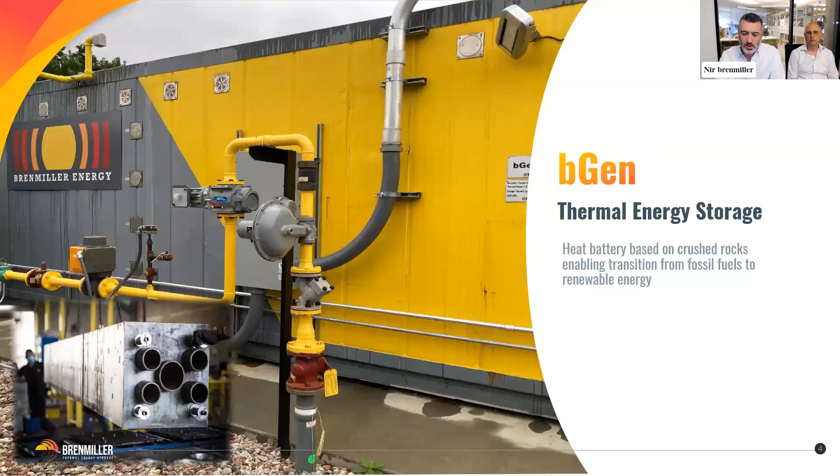So, our technology is named the BGen. It's a thermal storage that is actually storing heat in very high temperature. It's a heat battery. The heat is stored in crushed rocks, and this enables the transition from fossil fuels to renewable energy. And how it works. So we are storing heat coming from various sources, and I will show you shortly, in this modular heat battery. Each module contains cells. Then these cells are stacked into a module and into a pack. We are doing both capacitating the heat and exchanging the heat to steam or hot air or hot water.

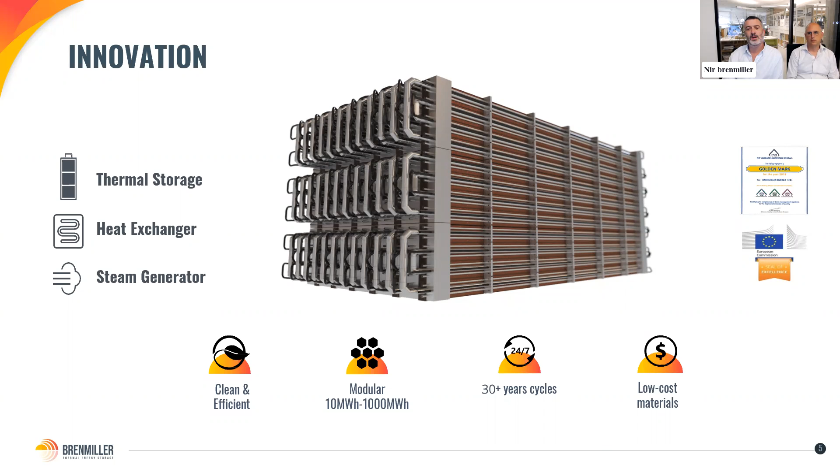All the materials we are using are eco-friendly. We are using only recyclable materials, no hazardous material, no chemicals, and no degradation over time. Our cycles here are unlimited, and it will work for centuries. There's nothing here to break or deteriorate. It's a very solid machine and a clean solution for clean energy.

So how it works? We are charged by either electricity or heat source. The heat source can come from solar, from biomass, from exhaust heat, can come from steam that is in surplus in a power plant, or can come from electricity. The power can come from the grid at peak hours, can come from solar, can come from wind overnight, or can hybridize. This amount of heat that you got can be topped by electricity or vice versa. Then we can discharge either simultaneously, which is quite unique for us, or in time shifting, and we discharge steam or hot water or hot air.

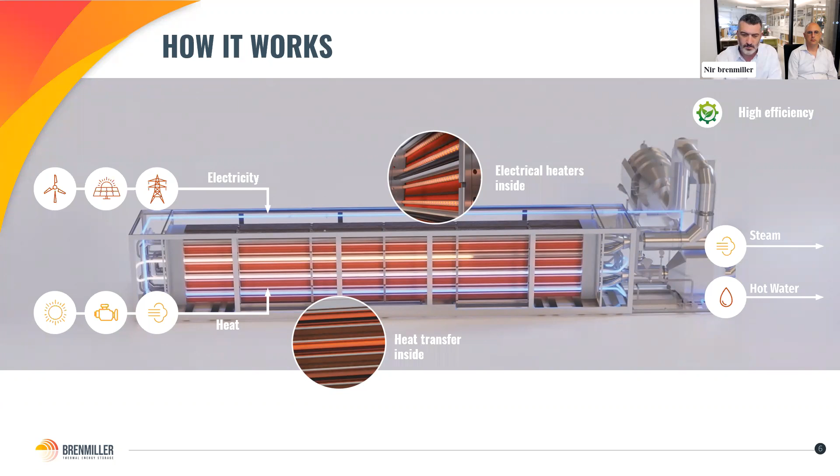The main update that we bring in this call is around the Enel project. The Enel project is a utility scale thermal storage that we inaugurated just lately near the city of Florence in Italy, with Enel. Enel is a global utility, and this project is first of its kind, and it's the first time that you see such technology incorporated, embedded into a gas-fired power plant.

It's a strategic milestone for the company, and it comes in a very special timing where thermal storage as a whole is getting a lot of momentum, and we'll show you shortly the numbers and figures of this market. This year, we have McKinsey pushing forward with the importance of thermal storage, and we'll show you shortly the reports and numbers they put up. And this project potentially will enable us to cooperate widely with the other utilities and with Enel specifically. We've been commercial in the industrial scale projects, and this puts us in a commercial ready position for utility projects.

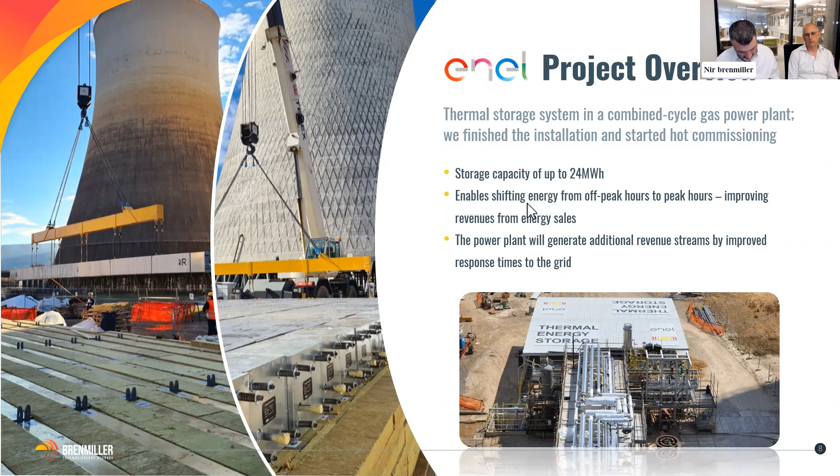Some additional updates for the last half. So we've signed an MOU with a couple of European renewable energy developers for the economical feasibility to integrate our technology into a green hydrogen production project. Now, the technology of Brenmiller is required in the process of turning the green hydrogen into a green methanol. They require 24 hours of process steam, and in order to keep the hydrogen clean and green, this steam needs to come from a clean source. So we examine the integration of our system in converting the green hydrogen into a green methanol in an electric way. We will power our system electrically and then generate clean steam.

We have withdrawn 4 million euros from the European Investment Bank as part of constructing our manufacturing plant. We will elaborate a little bit about it further down this presentation. But bottom line, we are progressing according to the timeline to be ready to manufacture at a very large scale, up to 4 gigawatt hour per year. And we'll be ready in the first half of next year with this production facility, and it's a very efficient and advanced manufacturing plant.

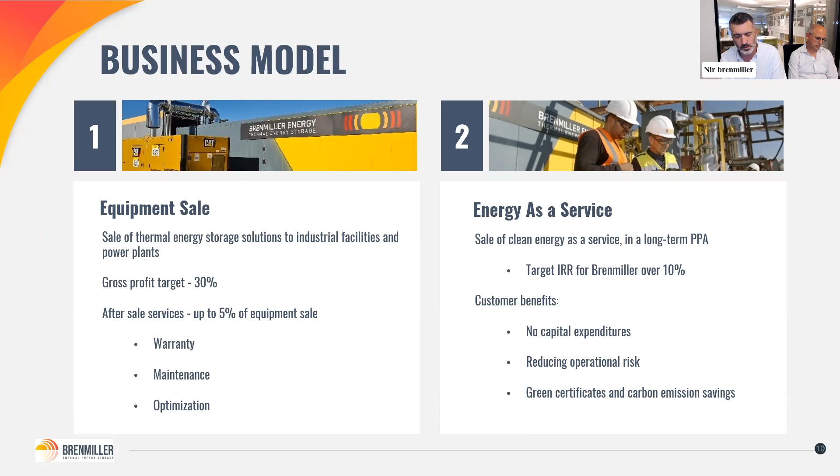And we have a very aggressive IRR target, and we believe that it's something that is doable, over 10% of project IRR, and you have recurrent revenues, and projects are getting in a very good position to be financed today with all the green support of grants, loans, especially in Europe, but also coming now into the US with the Inflation Reduction Act and some additional DOE plans. So we are preferring this model for most of the projects today, and this is the main business model we pursue.

The main project that we are focused on today is Philip Morris 1 in Romania. So last year we signed a framework agreement with Philip Morris International to decarbonize the production plant, and under this framework we have signed the first project in Romania. We are moving into detailed engineering after basic engineering.

We are planning to get permits in the first quarter of next year, 2023, and then to break ground. This is an approximately $9.2 million project, about 30 megawatt hour capacity, with the option to grow all the way to $14-15 million if the clients want to.

And this is a very important project for us and for Philip Morris, because we believe that a successful inauguration of this production plant will open the door to many more projects. Of course, we signed a framework agreement so we can work globally with this team, and they have over 40 production plants globally and an amazing decarbonization plan, and we plan to be part of it.

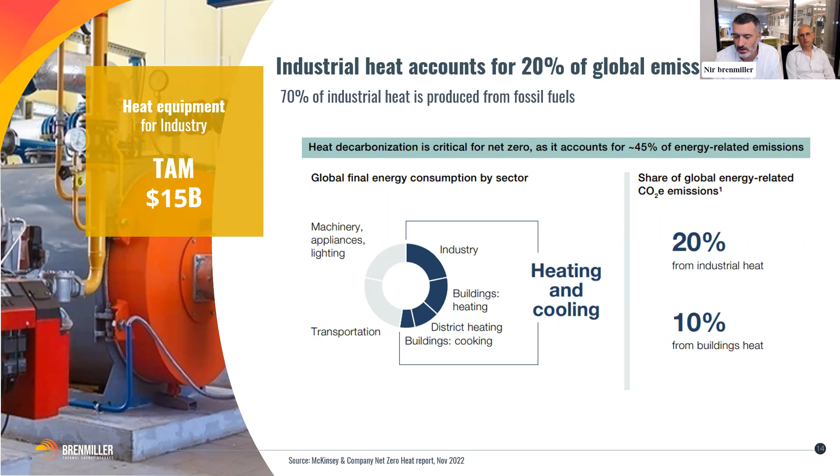Now, this is something that is not trivial, but industrial heat accounts for 20% of global emissions. That's maybe the largest single source of emissions globally. And most of it today is not clean, not renewable. We provide a market-ready, simple solution. We see it as our low-hanging fruit, immediate market. Especially in Europe today, where they have a gas crisis and 62% of Europe's gas goes to heating, us providing this simple solution to replace gas is very interesting, and we get a lot of attention from Europe today.

We do have solutions that we can explore in that direction, but in terms of business focus and technology focus, we focus on these medium range temperatures. We think that this is really the easiest chunk of emissions or energy that you can decarbonize. So this is our immediate market, and there is a lot of energy and a lot of market in the medium temperature range.

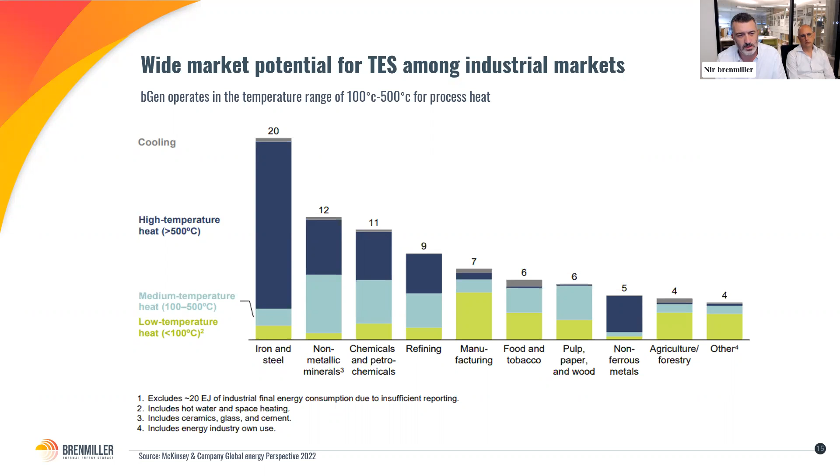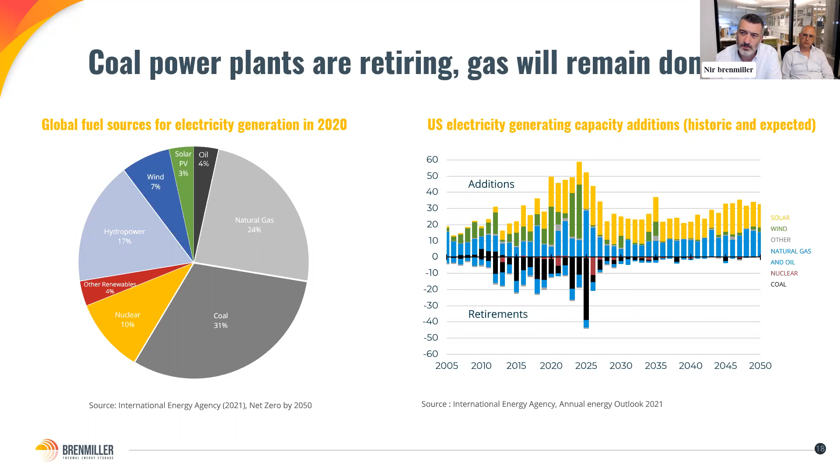So we need to do both: decarbonize as much as we can the gas-fired power plants, and we have all these decommissioned and retired coal power plants, and we provide a very interesting solution for retired coal power plants that I will show you shortly. Now, the more renewables you integrate into the grid, the more you see the profile on the bottom.

Okay, so you see low penetration renewables. This is the profile of this power plant. And with high penetration renewables, the power plant is required to shut down. And power plants cannot shut down. It takes them hours to ramp up. It takes them hours to cool down. So bottom line, they are burning the same amount of gas, the same pollution, the same emissions, and we are paying twice. So our technology enables these operators of power plants to shift the excess heat to our system, then to push it back when they need it, and bottom line, burn less gas and reduce emissions.

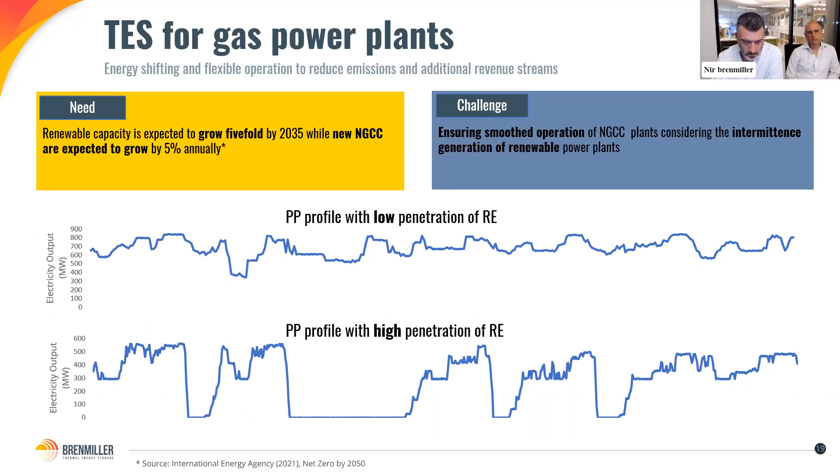This is for coal power plants. So we take an existing facility that is being decommissioned, we take electricity from the grid, we take surplus of solar power, and then we can shift it and convert this power plant, this old coal-fired power plant, into a green peaker using the same infrastructure, the same turbine, the same grid connection, in a long duration way and in a very large scale. It takes so many batteries to do the same that it's not going to happen with batteries. And this is something that we are investigating and developing for a future solution with our technology.

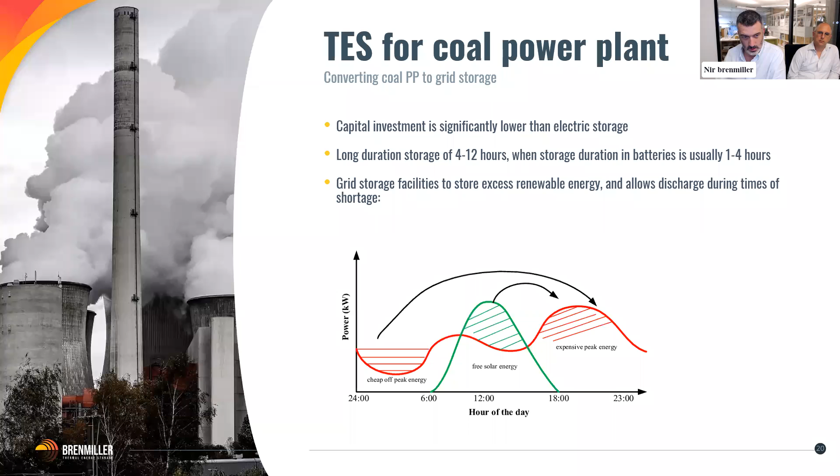So we have the immediate industrial solutions that are commercial, and we are marketing them to the market. We have early commercial initiatives with converting gas-fired power plants, and this is for a couple of years ahead, 3 years ahead, where we will start with coal-fired power plants. These are long processes and very big systems, so we need track record, and we need the market to see the Enel project running for a while before we can take it into the commercial phase.

We operate from Israel to the west, so we have few local activities. Our main attention today is for Europe. Europe is by far more advanced in terms of regulation and grants and loans, but also the special situation with Russia is taking our technology from being an environmental solution into an energy security solution. These accelerate the processes we have, and I believe that in the next couple of years, we will see the fruits of these processes that are running now. Most of these processes are industrial scale projects. As I mentioned, we are funded by the European Investment Bank, and Enel is our main pilot and partner to date in Europe.

In the US, we have built a pilot, and we are cooperating with the New York Power Authority, and we are examining solutions for industrial manufacturing and for district heating in big buildings in cold locations. We also operate in Brazil. Brazil has a highly volatile market of energy and gas prices. We have partnered with Fortlev, a local plastic equipment manufacturer. The company itself is using a lot of energy in their production facilities, rotomolding machines. So we integrated the system into this rotomolding machine, and now we are in phases of designing and erecting a new production facility for this technology in Brazil together with Fortlev.

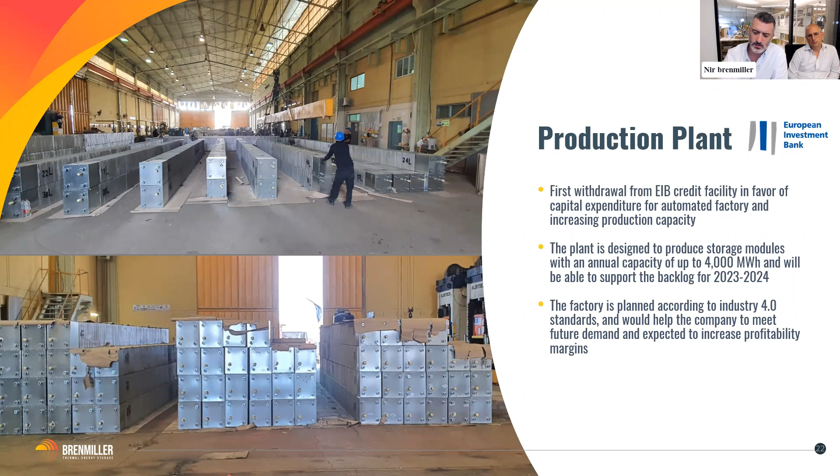And this is it for today. I must say that the thermal storage market is booming. It finds us in a very interesting time where our technology is market ready, and we have very big and impressive pilots in place. We believe that there is an amazing gap between the capital markets and the energy markets where we operate. Our business market is not affected by interest or any demand that is going down. On the contrary, I think that in due time things will align, and I hope and believe that capital markets will stabilize, and then we will see a correlation between what the company is doing in business terms and how the company is doing in the capital markets.